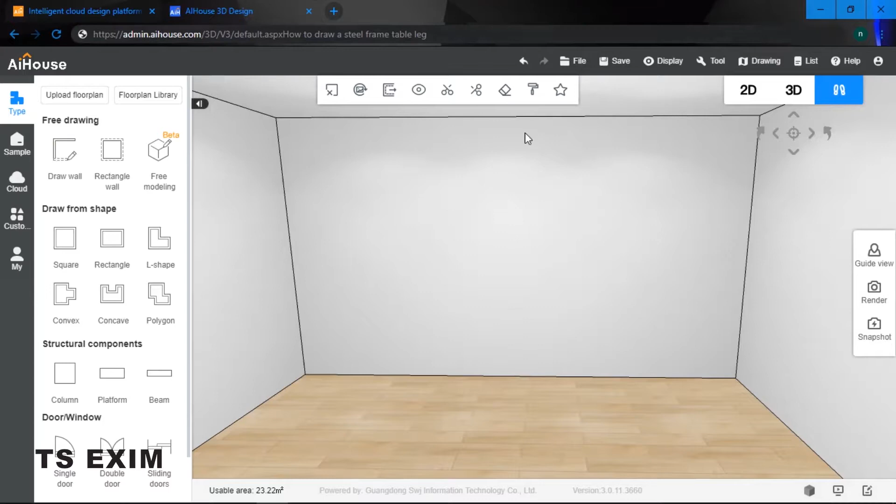Alright, let's get started. Firstly, go into your customization function, then click onto your kitchen cabinet function. We will be using a super plate to create our steel frame table leg. Key in 'super' and you can find the super plate.

Once you're done, we can always resize the plate. For my width, I'm going to resize it to 800. For my depth, I'm going to resize it to 1100. And for my height, I'm going to give it a 50.

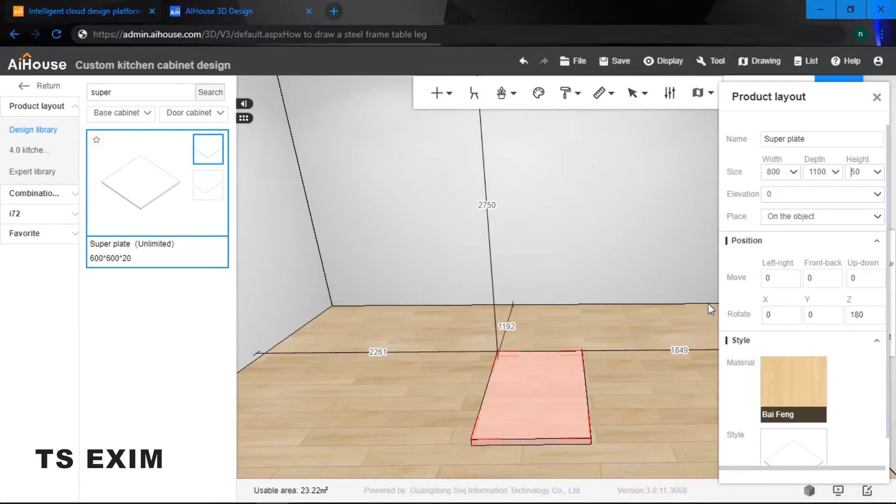Once I'm done resizing the panel, I can click onto B, go into my board selection mode, right click on the panel and select panel point editing. Right now we are inside the panel point editing function.

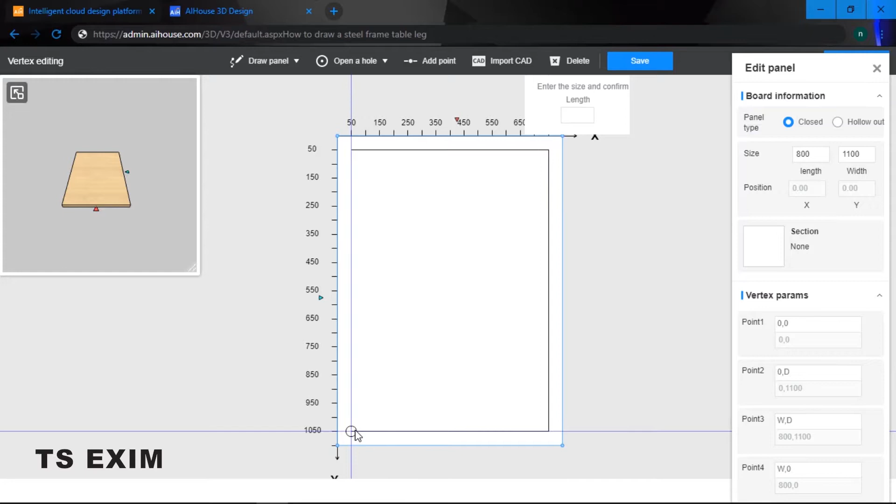We are going to open up a hole in the middle. We can always use this function, open a hole and then click on free drawing. Right now I'm just going to draw a rectangle. Once I'm done drawing a rectangle, I should see a hole in the middle.

I want my dimensions to be 30. As you can see right now it's 50 for the gap. So to change it to 30, click onto the hole which you just opened, and at the corner you will see a circle. Click on the circle and then change the vertex coordinates to 30 for x and y axis.

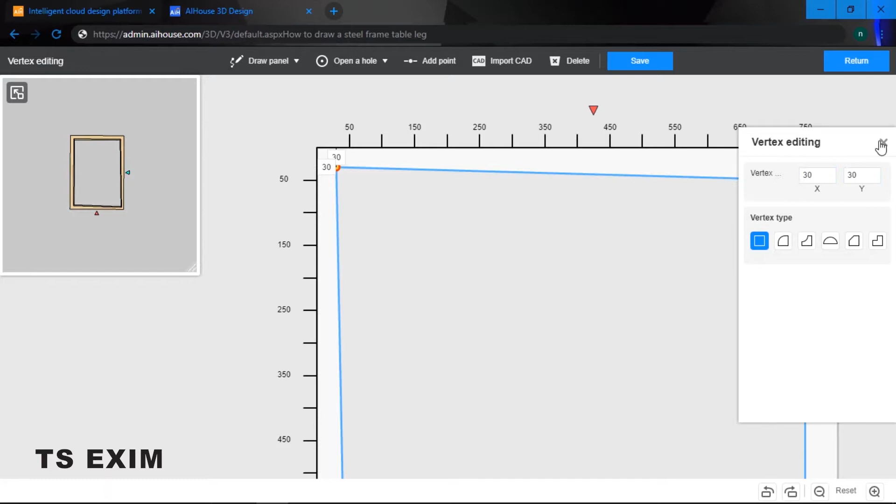Repeat the steps for all four sides. So I'm going to change it all to 30 for this side as well. 30, 30, and then the last one 30 and 30. Now I would have something like that. When I'm done, I can just click on save and return.

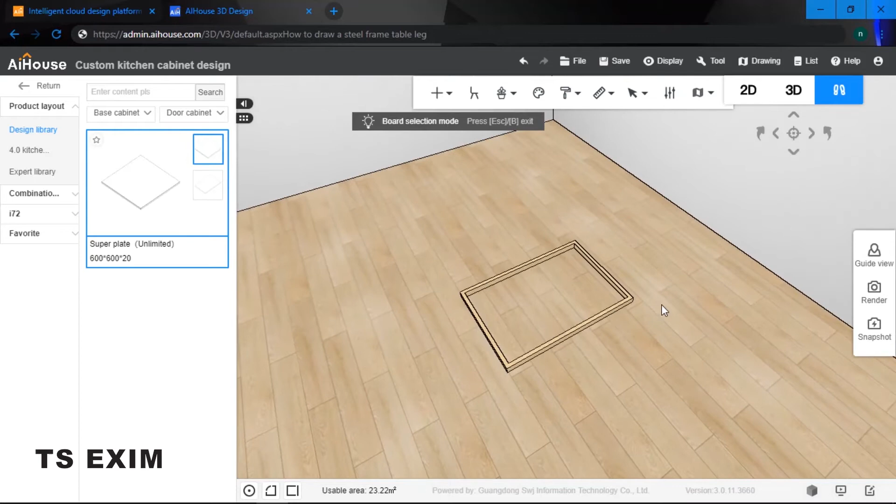Basically I have something like that, which is the frame table leg. Now I can click on X to rotate it up and then click on Z to move it. I'm gonna place it onto the ground, so I just key in 0. Next I'm gonna move it slightly to my left.

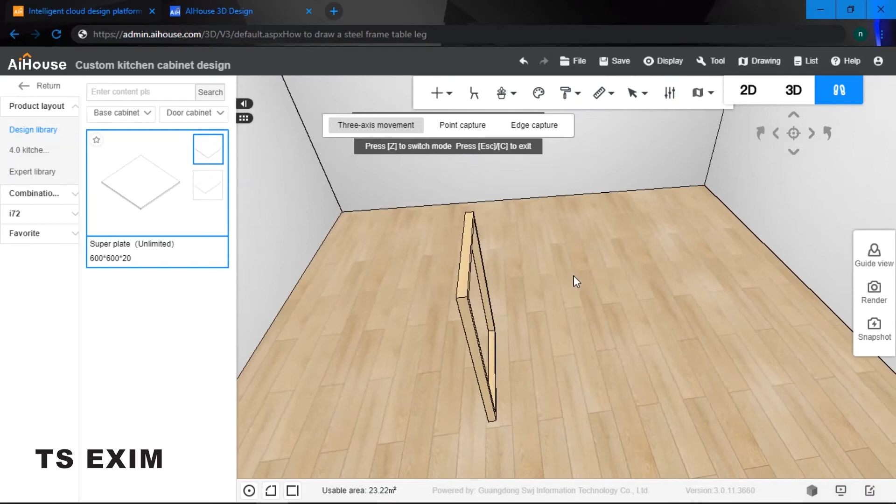I have one frame leg already, so firstly I can change the material first. I'm going to select a metal material and then just type in steel. I'm going to choose this color, choose.

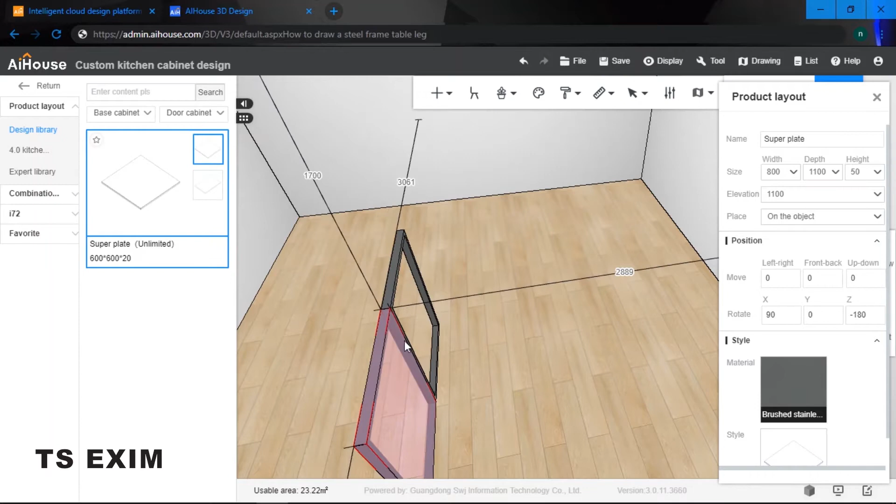Once I have one already, I need to copy another one. Just click on Ctrl V. I copy another one and then adjust the placing. So over here to over here it's 2280, I know, so this one I'm going to change it to 2280. Now we are going to create a panel in between these two frame legs.

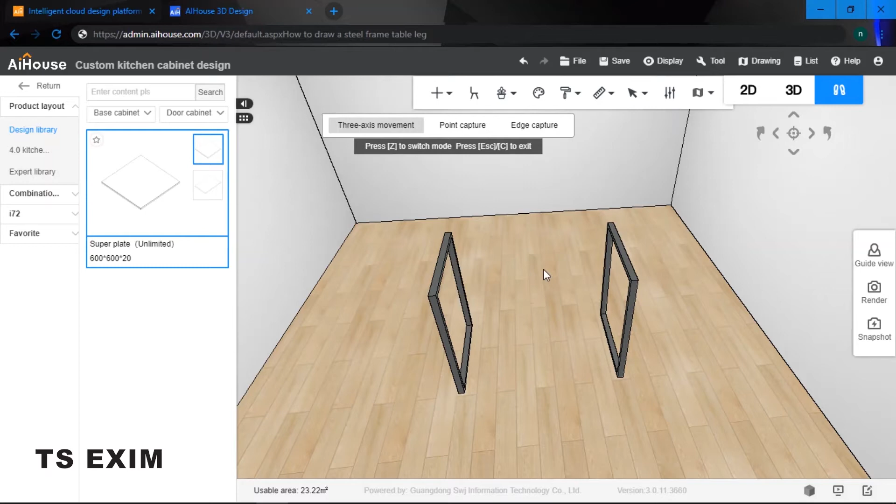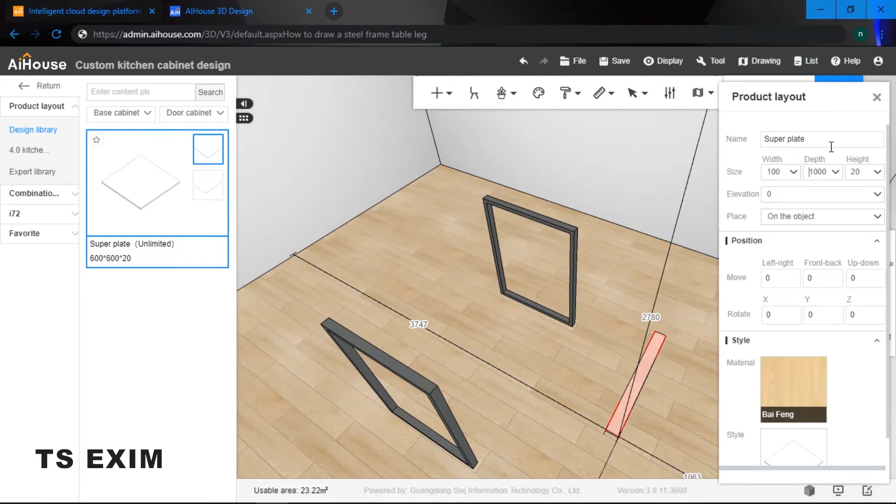Same thing, we are going to use a super plate. Drag a super plate out and resize it. For my width, I'm going to resize it to 100. For my depth, I'm going to resize it to 1000. For my height, I'm going to put it 20.

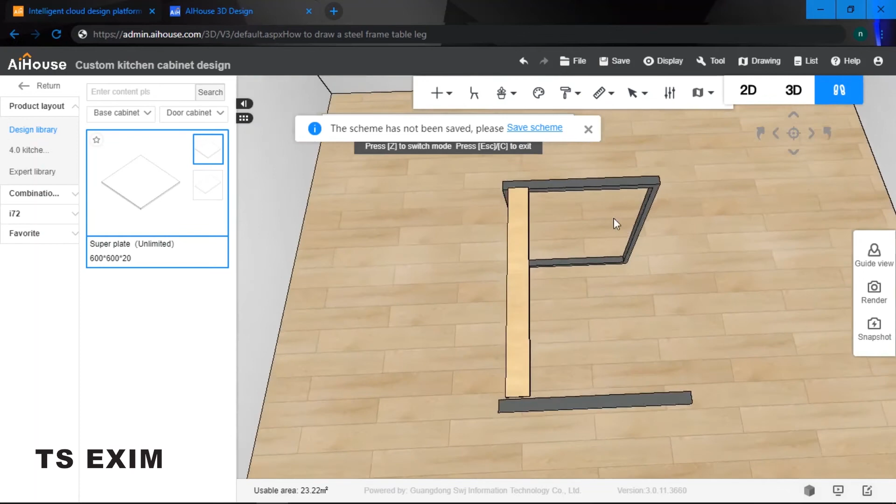Once I have my panel, I'm going to just move it onto the leg frame. So I'm going to just move it, place it 1000, 1100.

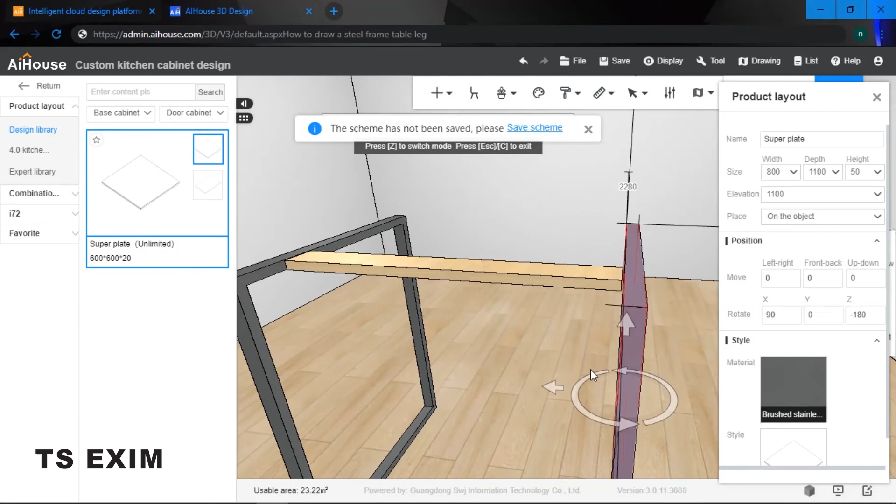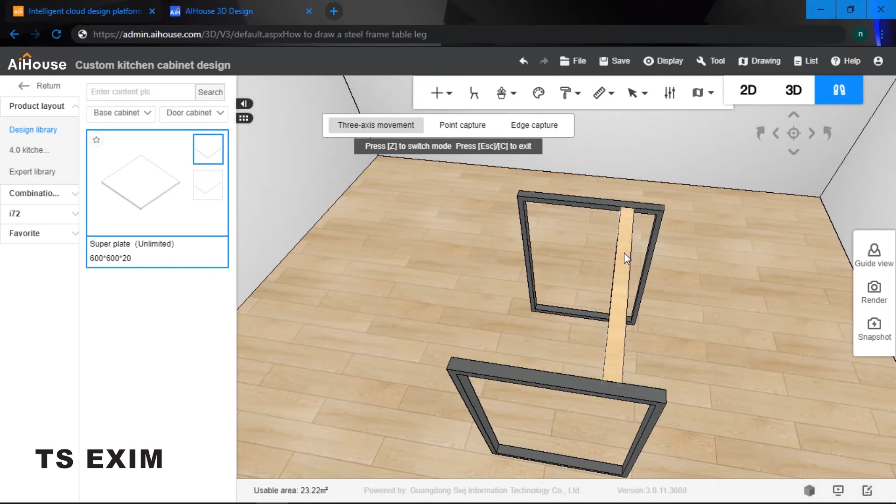Alright, so I have one frame done, but maybe it's a little bit too thick, so I will change the width to 70. Now I would like to have another one, so same thing, click on Ctrl V, copy and paste and then just drag to position it.

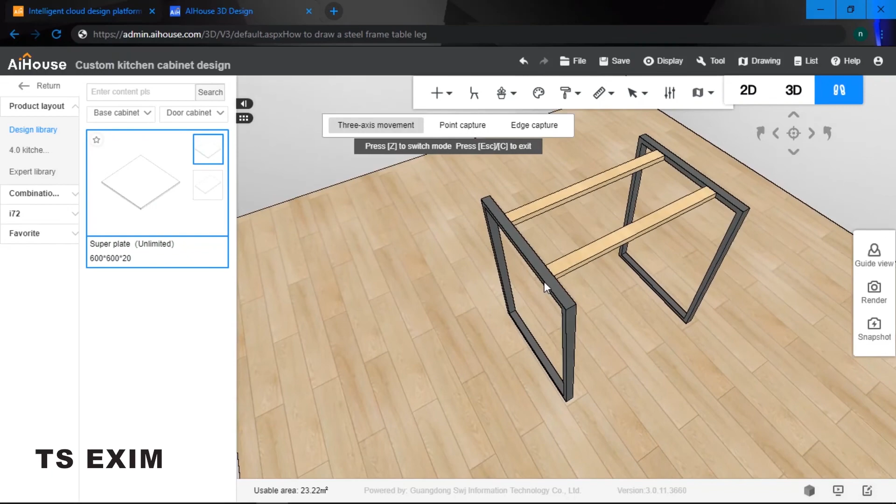Once I'm done positioning both of this panel, I can use the material painter. Right click onto your steel frame leg, then choose format painter, material painter, and paint these two panels. Basically I have my steel frame table leg done.

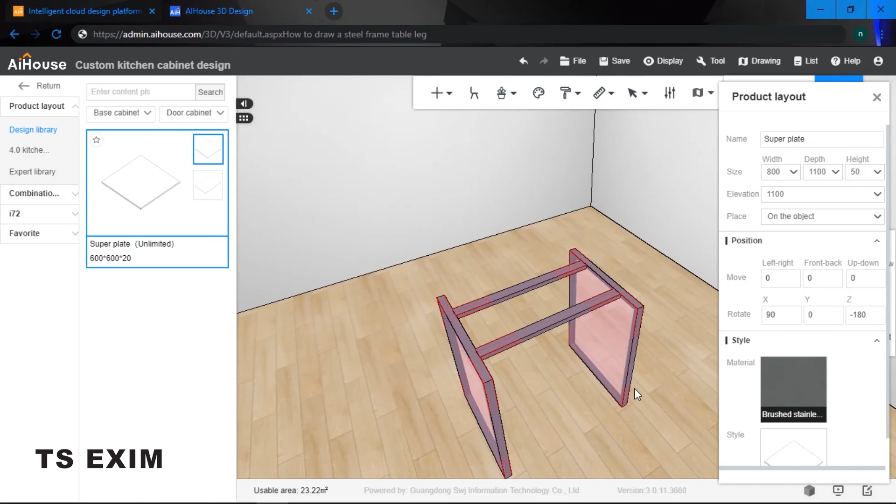Now I would like to group them up. So hold on to my control button and highlight the entire thing, then we can press Ctrl G to group them. Then we can always save it to our favorites, so in future if we want to use it again, we can always go to our favorites and just drag them out directly to use it.

Alright guys, so this is how to draw a steel frame table leg. Good luck trying, guys.